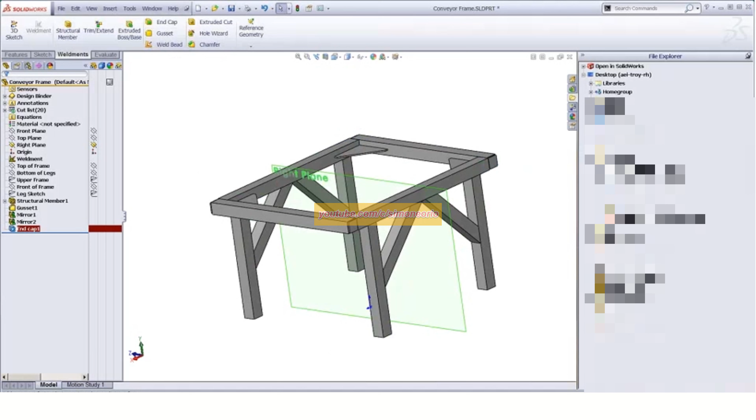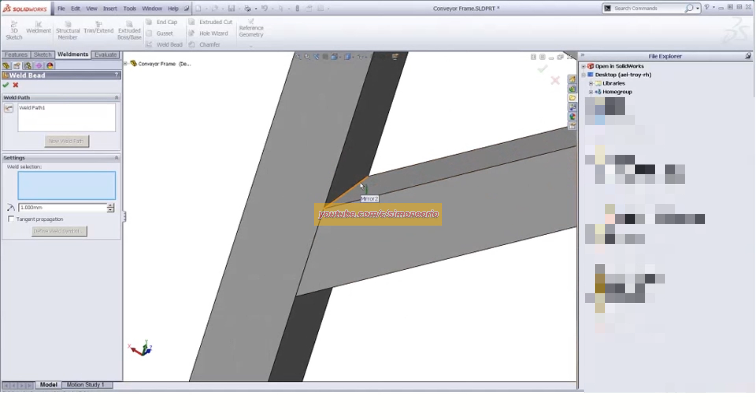All right, the other neat thing we can do with this is weld bead. This one's pretty neat, especially if you're wanting to see or guesstimate how many inches of weld you're doing. We can click on a weld bead here. I'm just going to go ahead and take here. And notice here between these faces, let me make a big one.

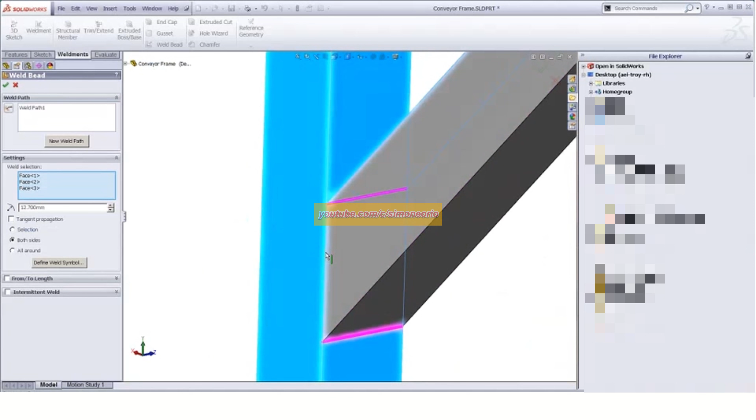Okay. So when I click OK here, what we're going to get is a big, huge representation in this caterpillar-looking piece. Now, this is not a solid body. This is just a gigantic visual representation of that weld. And take a look here. When I added that on, if I look up here, I have a weld folder.

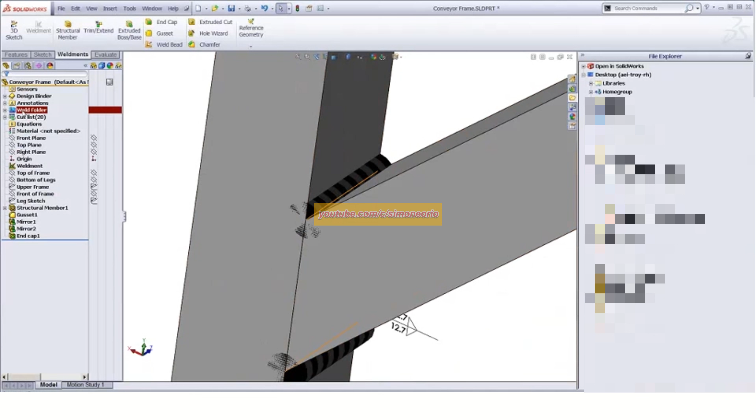Once that weld bead is created, I can go into its properties, and now this is pretty cool. We can tell it what material we want. We can tell it what process we want. Knowing the material, what is the mass per unit length, what's the cost, how long is it going to take? All this information can be pulled out in a bill of material, so we could guesstimate based off of that welding.

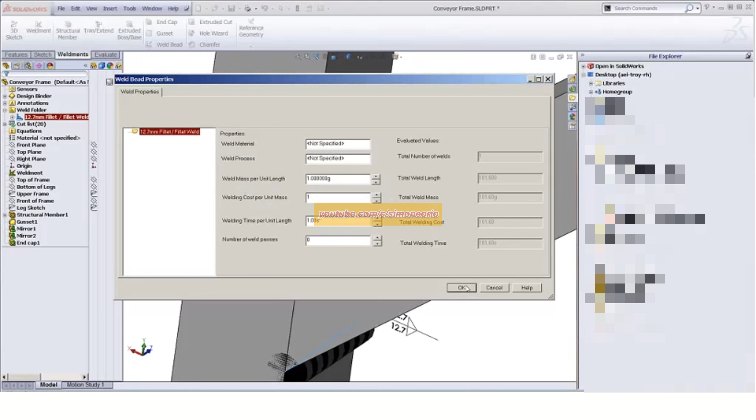I don't know a lot of companies potentially using this, but it's a great way, especially if you had a really big job. How much welding is needed for something like this? Because you may not know. So we can tweak those properties if we need a different weld there. Now, one of the things I didn't do with this gusset, let me go back to this for a second.

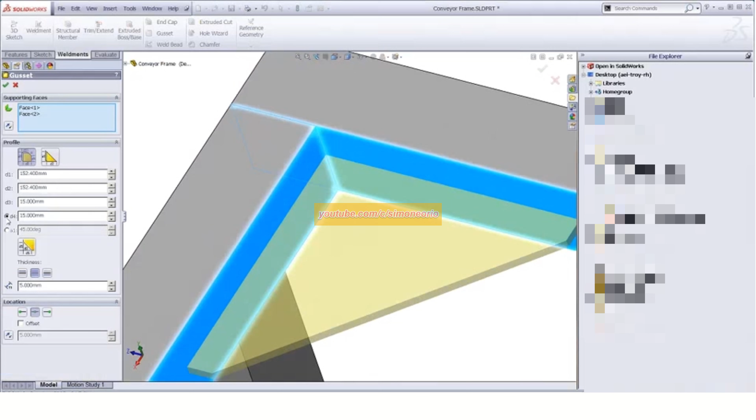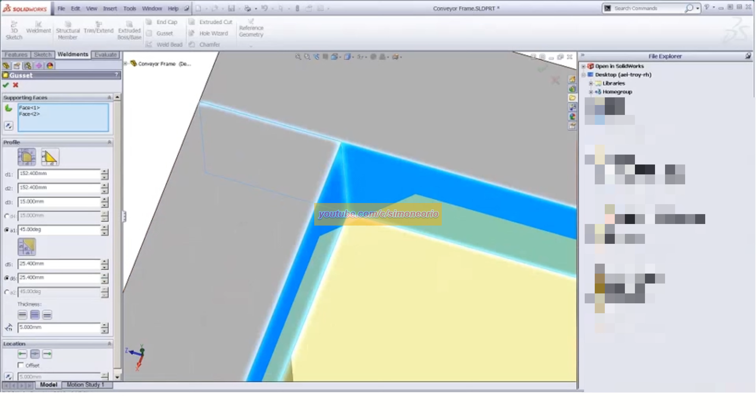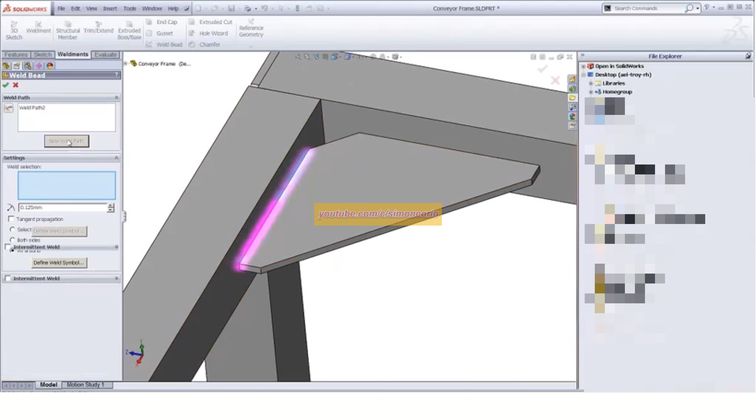And once again here, I can click this all around. We can get this to go all around. Now we did one weld path. Just like we can do new group, we can do a new weld path and do another one. You can define the weld symbol, or once the weld symbol is created, you can double click on it and tweak it however you'd like. Notice we can do intermittent welding if we'd like to. So we've got all sorts of different choices here.

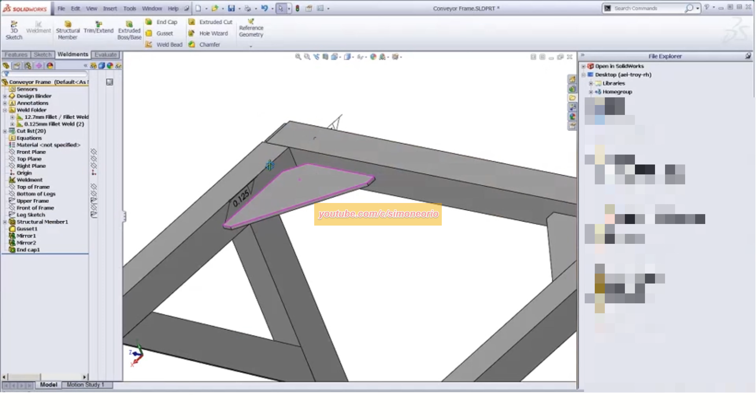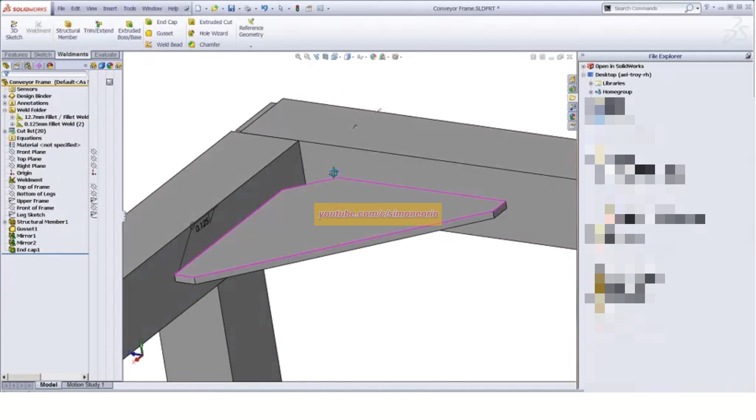Oh, I hit escape out of there. Oh, no, I didn't. I've just got some graphics turned off. Yep, I'm having a little bit of a glitch in my viewing. What we should see, that is weird, is something like this over there. I'm not sure why, just a little graphics glitch. No big deal. And we'd see that representation.

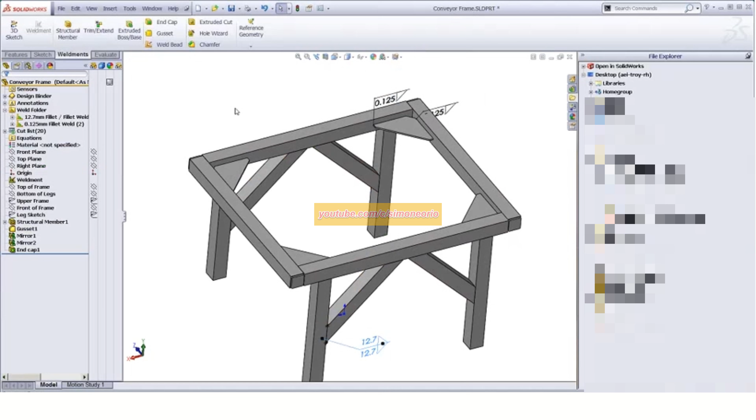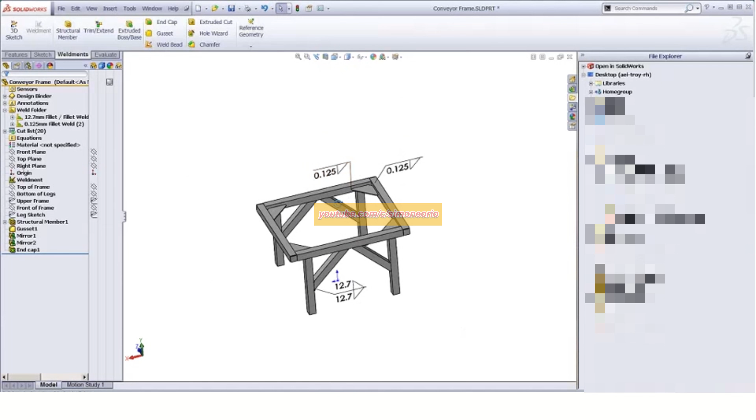The nice thing is, I could send this as an eDrawing to a fabricator, and we'd have the weld specs all set out. So instead of a drawing, they could look at it via eDrawings, use the measuring tool, a bill of material can be placed in a part file, and we could push that to them for costing.